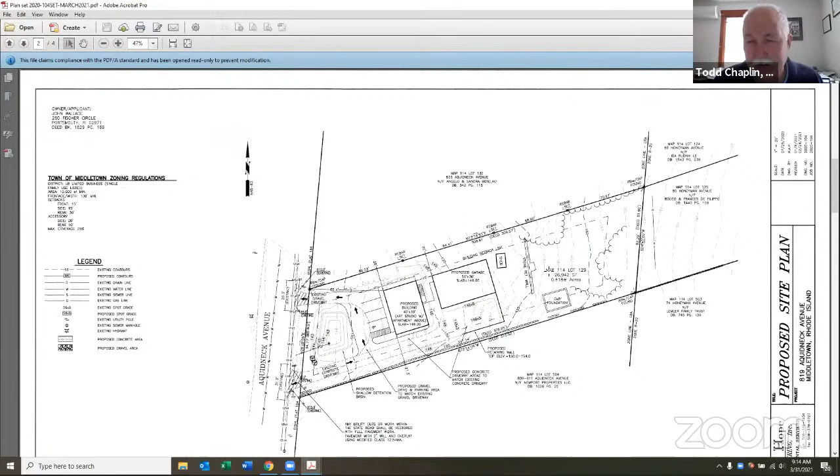Typically, that allows for the traffic to be able to accelerate out onto the main road without spinning gravel or whatever, and having that be paved just keeps snow plowing and entrance in and out of the site a little safer for everyone. So those areas are going to be improved.

We are going to replace the 2 culverts, one under each of those driveways. They're going to replace both of those and repair 3 of the 4, and probably could certainly end up being all 4 of the little head walls that are on those culverts. There's an existing shallow swale that runs along Aquidneck Ave in that area, and they will clean that swale out and restore its depth and elevation as part of that. So some of the culvert is a little filled in, and that'll all be restored back to new condition essentially.

And then there will be a new small detention basin built in the front of the property, like many of the properties that are out on Aquidneck Ave on that side of the road. The drainage calculations show that the runoff will actually be reduced from what was there before, by having this swale there prior to having the retention basin there prior to the swale. So all the storm water from the site will be captured there, and then it can overflow to the swale if need be. Otherwise, it would be retained on site.

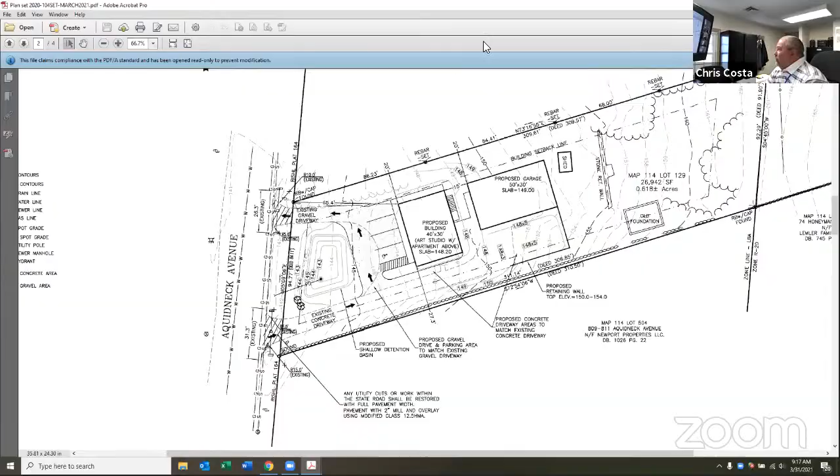Okay, special use permit - it's a little larger than I was expecting, having rentals for half a dozen people to go use their pottery equipment in a meeting place. I was almost under the impression I could do it with a home occupation, but it's a little more and above. So I think it's a great idea, but it's going to require that special use permit for the mix on this art studio.

Besides that, I'm all game. It's a very nice plan.

Yeah, it was close to being allowed as a matter of right, but oh well. I certainly understood - with the size of the garage and the square footage and how small the apartment was, the commercial wagged the dog, the tail wagged the dog is what happened. So yeah, I thought it was an appropriate request to do what we have to do. I just think it's a nice project.

Yeah. Very good. All right, you're done, Chris? You all set? I'm done. I like it, I'm done with that.

I'll help any way I can when it comes time for that application for the special use, when you get over these hurdles. Thank you.

Warren Hall, let's go to you next. Thanks, Ron. Thanks, Todd. Court, appreciate it.

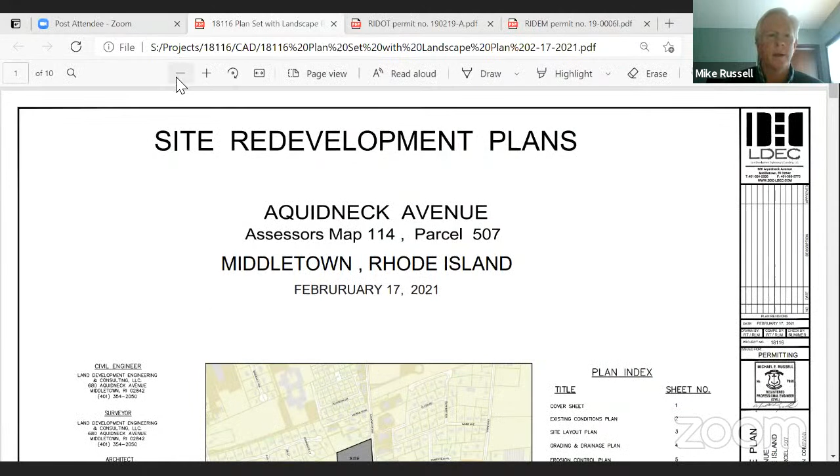Oh, okay. Yeah, I didn't know how you did the last one, whether that was there. That was me, but I just popped up the site plan. But I mean, I can do that here too, but it might be easier if you do it. All right, how's that? Can we see that? Yep, okay. Let me just zoom out a minute.

Okay, so just following up on Dave's introduction here. So the subject property, as shown on this existing conditions plan, is lot 507 on Aquidneck.

It's roughly 2.8 acres in size. As Dave mentioned, that was for a long time a contractor's area materials yard run by JM.

A1 Construction has taken that over in recent years and utilized it essentially in the same manner it had been used previously. The site is located in a Zone 1 watershed protection district.

There's freshwater wetlands to the northwest, in the northwest corner of the property, as shown here. Is my cursor active? Yep.

Okay, in this area here, all of the proposed site improvements are going to work within the existing limits of disturbance.

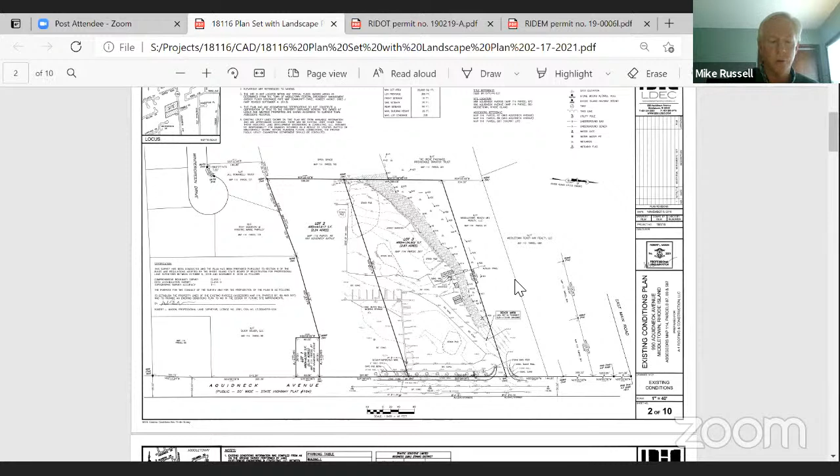So that's very important to note. As Dave said, there's 2 buildings being proposed for this application.

Let me just go to the site plan here. So the building nearest Aquidneck Avenue is going to be a mixed-use building.

It's just under 11,000 square feet in footprint area. That'll consist of office space in the front, 2 levels of office space.

And then this rear section here will be a tradesman center, which are very common and popular on Aquidneck Avenue in Middletown. The rear building will be a standalone tradesman center with different units in there.

And that's a little over 5,000 square feet. Dave talked a little bit about the access off of Aquidneck. So the property line, if I can zoom in a little bit more.

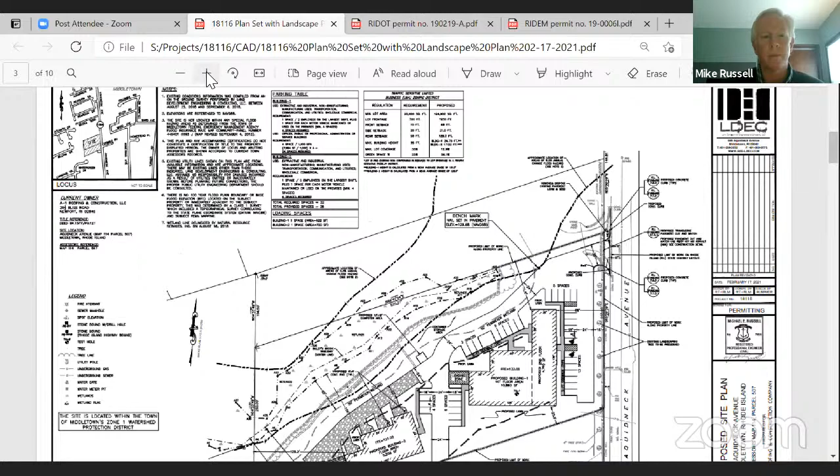So the property line effectively goes through the middle of the existing driveway that's there now. So it's used both for the Cardi's operation here to the north, and also the A1 operation.

So it's shared. What the applicant wanted to do was widen the curb cut on this property to kind of separate the two uses, the traffic of the 2 uses, and that was proposed to DOT.

That afforded them a 30-foot opening there. So there's an existing stone wall, excuse me, return there now that is entirely on the applicant's property that will have to get removed in order to accomplish that.

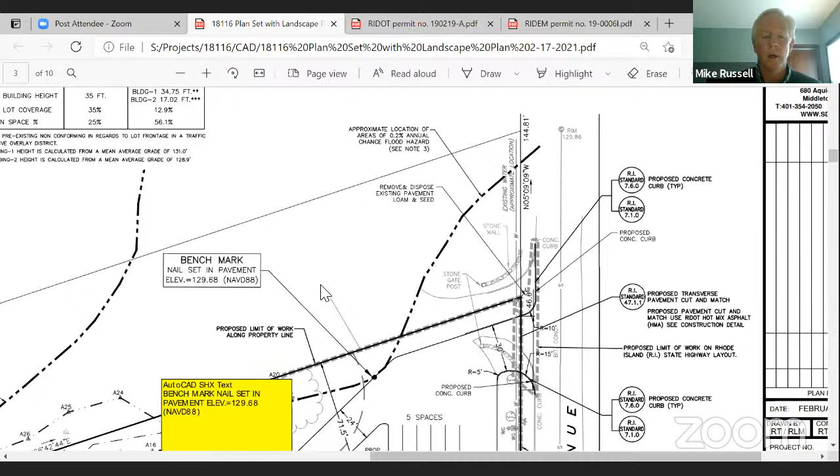So for these intended uses, we've identified the parking requirements for those uses, office and the tradesmen's units, which in discussion with Dave and the town...

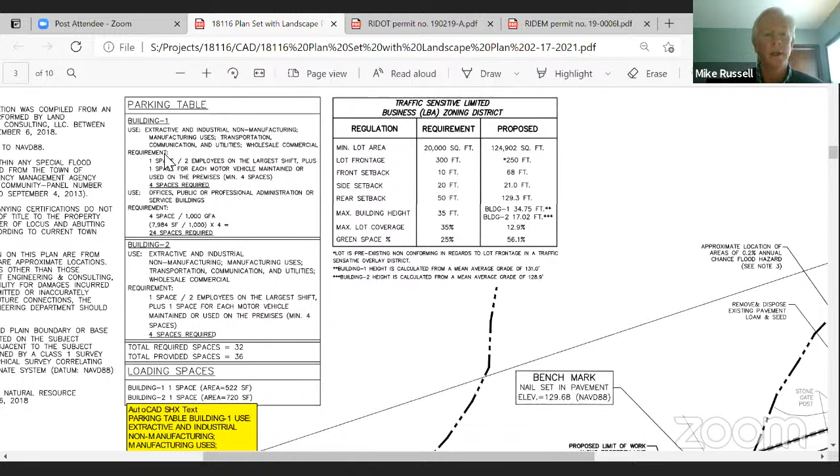I guess there's been a recent category change in the zoning ordinance. It's now called extractive and industrial non-manufacturing, manufacturing uses, etc. So from that, the required spaces are 32.

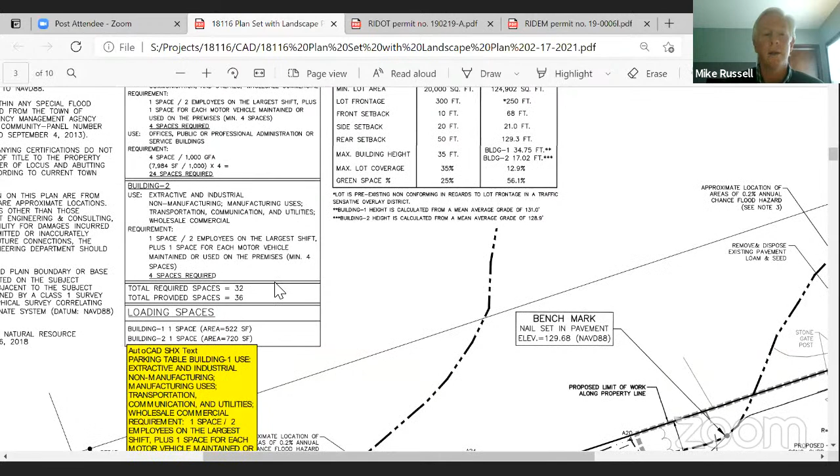We're providing 36 to include handicap spaces. We're also providing loading space for each building.

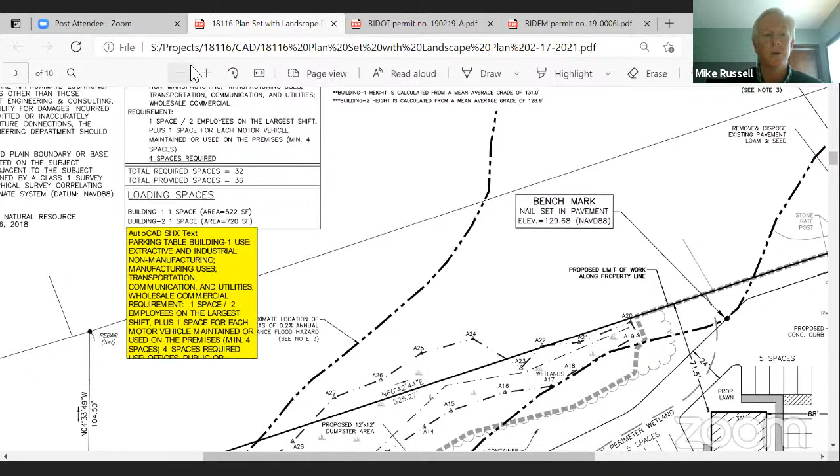If I can zoom out, we can get a better look at the overall parking. So you can see how the parking is provided around the site to service both buildings.

There's a series of sidewalks to the different door access points for each building for occupants.

We're also, the applicant would like to maintain a connection to the materials yard to the south, which he has an interest in that property as well.

I'm not sure whether Sean is on this meeting or not, but he can certainly speak to that in more detail, what his long range intent is there. But for the purposes of this application, we are showing a connection for two-way traffic to keep that loop open.

Let's see. Green space and lot coverage, we are well under the allowable lot coverage for this zone.

We're providing double the minimum required green space for this property in accordance with the commercial design standards.

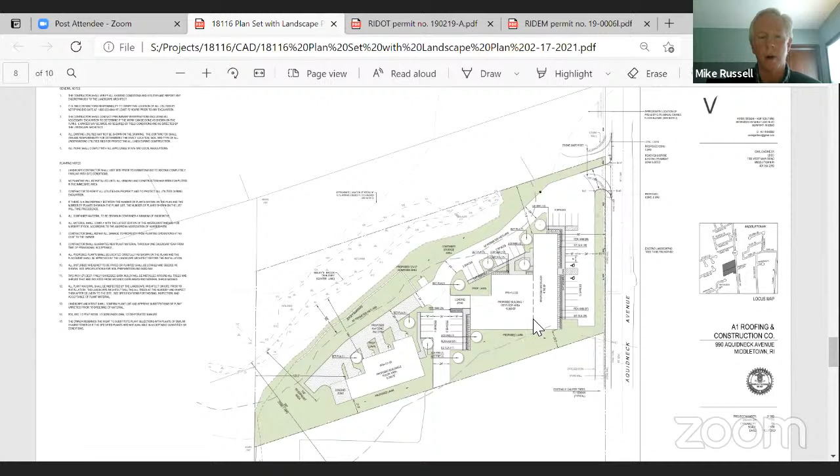There will be landscaping associated with the project as well. Pam Rogers from Verde Design prepared a plan which provides parking lot trees, lawn area, and low-level planting. We also benefit from existing street trees along Aquidneck Avenue. There are several there that are not fully mature yet, but they're well on their way. As I mentioned, we doubled the minimum required green space requirement.

Stormwater management - as Dave mentioned, this went to DEM for a wetlands permit and also for stormwater. There's nothing there on the site now, so for all intents and purposes, as far as DEM is concerned, the site is a mix of existing pavement and compacted gravel. It's nearly 70% impervious, and we're dropping that down to about 50, I believe 56%, with the addition of the green space.

This is a redevelopment project, so we employed a lot of low impact development practices - filter beds, vegetated swales - to mitigate storm flows and provide the required water quality. We're maintaining the discharge points on the site, which are to the rear, toward the wetland. Everything flows from Aquidneck Avenue towards the wetland area. We provided storm controls, and during construction there will be erosion controls to protect that resource area.

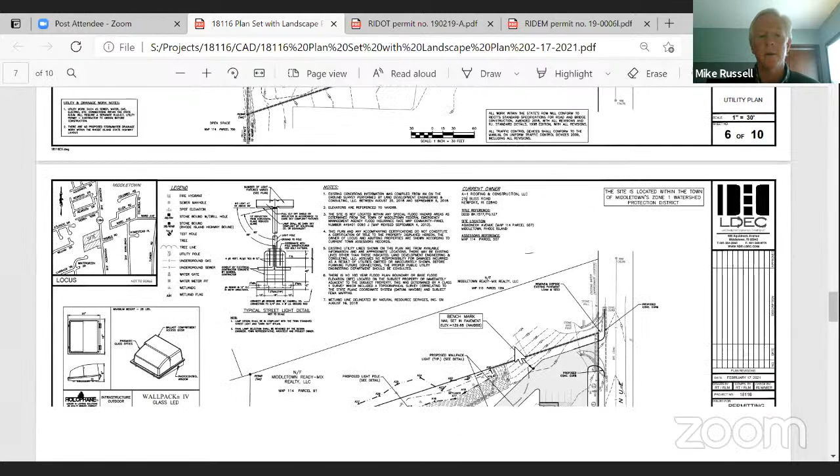For utilities, as Dave mentioned, as required by the development plan review process, we sent a request to Newport Water for availability for this use. It is available.

There will be a permitting process following approval of this project with the town of Middletown to receive water service. The plan is to have two domestic services, one for each building, and the forward building will have a sprinkler system and will need a dedicated fire service. So we need to apply to Newport utilities for each.

Sewer will be under the control of the town of Middletown. There's an existing stub here that comes into the property. We're proposing a gravity service to a manhole at the property line, connecting to that stub for the forward building. As of right now, this needs to be worked out with the town, but we're showing a force main to lift wastewater from the rear building to that manhole. It's borderline whether that can be gravity or not - I'm a little concerned about cover and we're trying to avoid other conflicts, but there is a sanitary solution one way or another for that building. For now, in this application, we're showing a force main with an exterior pump station. The flows will be extremely minimal for the rear use, and somewhat minimal for the forward office and tradesman center use.

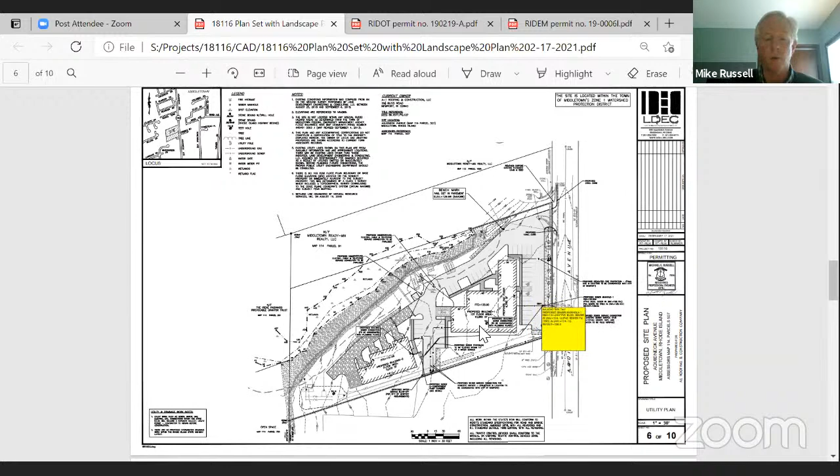The second waiver is for the 20-foot buffer to the residential zone back here. We're afforded a natural buffer there - there's no development in close proximity to the rear of this lot, so we felt an additional buffer would not be necessary and the waiver was justified. Those are the 2 waivers being requested.

Do you have 20 feet of natural vegetation on your property? Even if it's not landscaping, if it's natural, that could satisfy it. It doesn't necessarily need to be formal landscaping, as long as there's some sort of vegetated buffer of 20 feet on your property.

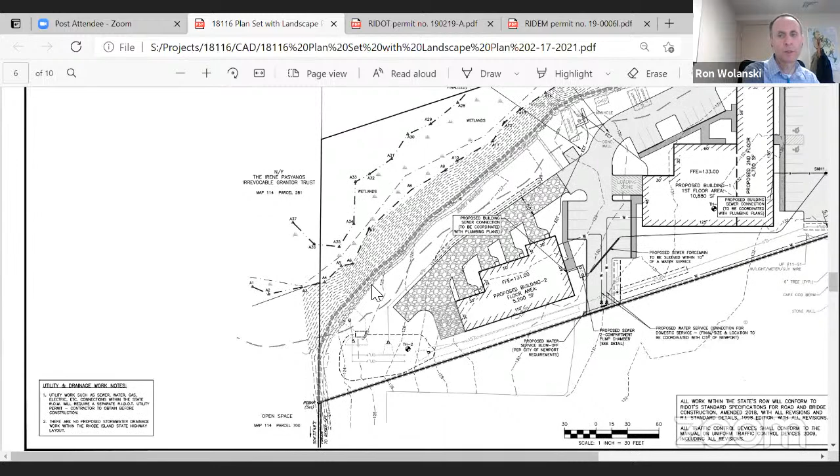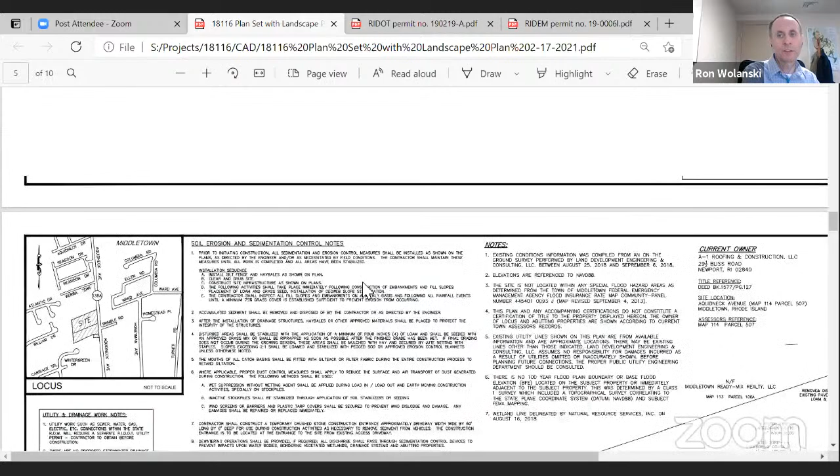What would qualify there, Ron? Vegetation - grass? Well, it's got to include screening, so if the vegetation is 6 feet tall, certainly... yeah, I think in this area here, because of the grading, this is the specific area why we requested the waiver. Oh, okay, all right, never mind.

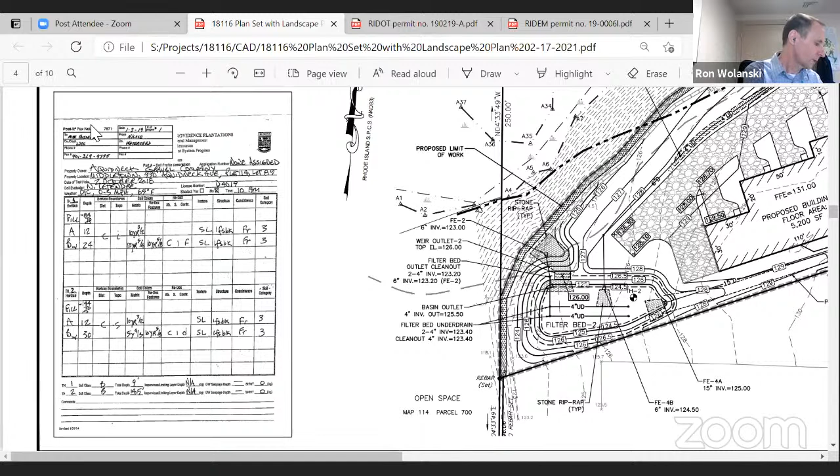So that's a general overview. I may have missed a couple of points in the site improvements, but happy to turn it over to the TRC members for questions and comments.

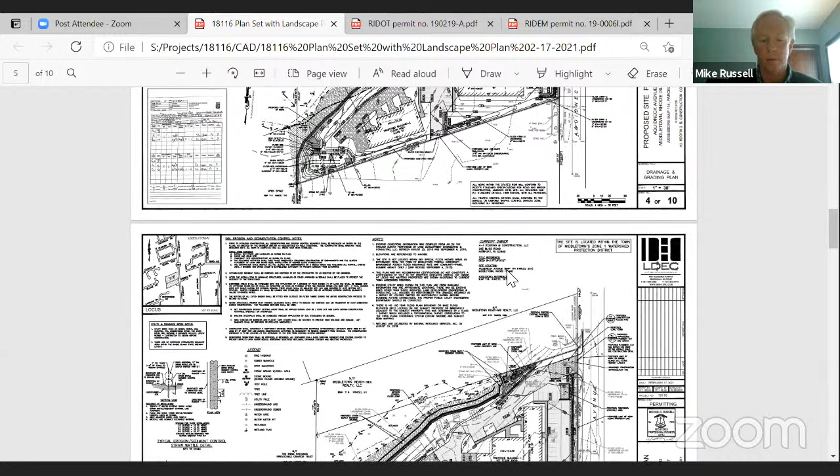You want to go first, Warren? Thanks, Mike.

A couple questions on the drainage calculation - since it's a redevelopment, 50% of the water quality volume needs to be treated, correct? That's correct. Is that what your volume is, or did you go further? That was the approach, yep, for redevelopment, to meet that at minimum.

And then I know you mentioned the wetland permit, July 2019 - do you know the shelf life on that? Is it 4 or 5 years? It's a 4-year permit. Okay, so that's going to stay current.

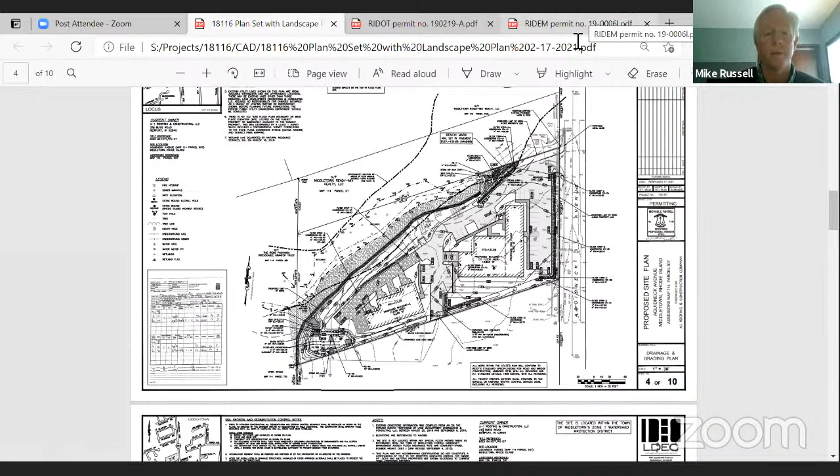And how about the physical alteration permit from DOT - what's the shelf life on that? I believe it's 3, but let me just check while we're talking. We're coming up on 2 years for these, right? Yeah, I'm coming up on them. For whatever reason I can't access that, I'll dig it up while we're talking. I believe it's 3, Warren.

Good, okay, just for everybody's benefit here - the other item I had was the north edge of your paving, the parking area, your driveway access basically. It's 3 years, Warren, sorry, that just popped up on DOT. Oh, they're good for 3. Yep, DOT, okay.

North driveway - I'm interested in the curb you have along that edge. Is that water going to peel off there and flow right into wetlands, or is it directed along that edge via curb to your basin, to your treatment? Okay, let's zoom in on that area to make sure I understand your question and can answer it.

All right, Ron, did I stop sharing? Yeah, no more sharing, Mike. How's that? There you go. Yep, okay.

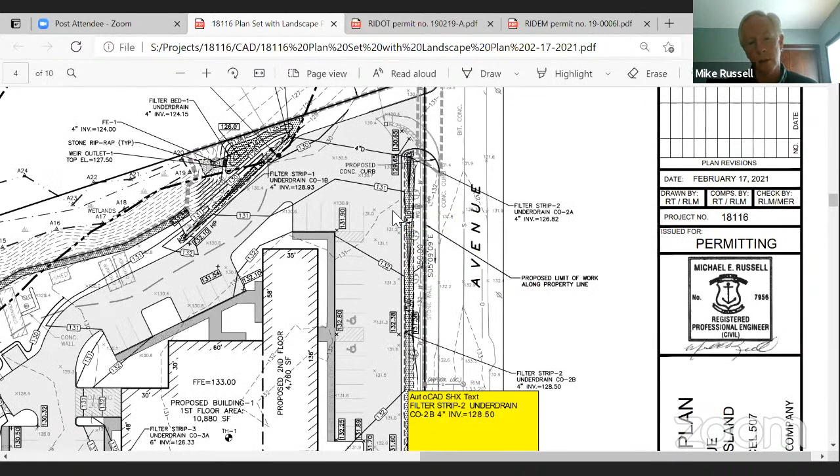As you enter the site, the Carty's property to the north sits lower than this area. Looking at the proposed contours, which essentially mimic what's existing, as you pick up this elevation here, everything that breaks off this corner of the sidewalk will get into this filter practice. Everything else will continue where it's going now - it's basically this small area right here, Warren, that'll continue down to the lower area. But the overwhelming majority of everything on the site will get to this practice first, then to this practice along the parking area parallel to Aquidneck Avenue.

So everything inside this driveway that sits low is canted towards Carty's - there's no way to deal with that on the applicant's property. We're picking up as much as we possibly can, but it's impervious to impervious; it's not like we created anything else there that would go unmitigated. Yep, I see that, absolutely. And then as you head further west along that edge of pavement, Mike, what happens then?

Right in here? This edge here, yes. This here is a filter strip. Right, so that collects everything off of, well, we have a series of filter strips.

That's the practice that we had, for all intents and purposes. It provides storage, it provides infiltration, and it provides treatment. But the practice as it relates to DEM's approved practice is a filter strip. So this is all along this existing limit of disturbance.

We are providing a filter strip, and then we're providing a filter strip along this edge. And then you have this practice down here. So how the flows split, they get to these three different practices off this west edge.

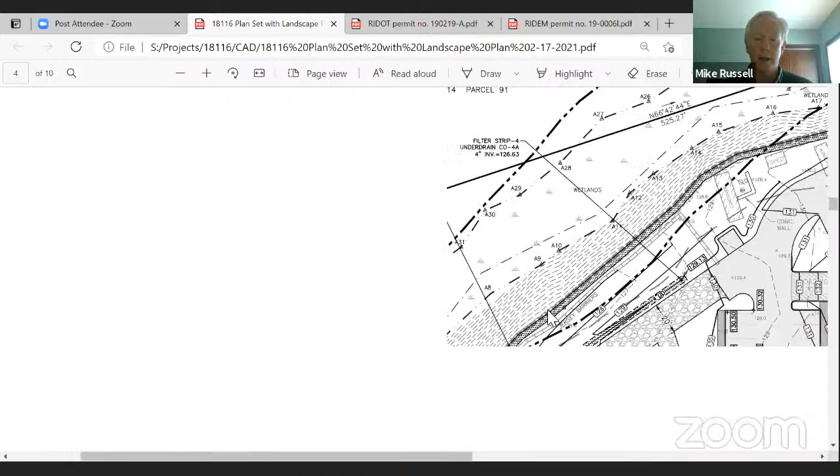So those under drains are interconnected, and they all either work to this discharge here, or the discharge out at the other end of the site here. Perfect.

So any contaminants that flow on that impervious pavement asphalt that you're proposing are going to be intercepted by the filter drain before they get out into the wetlands. That's correct.

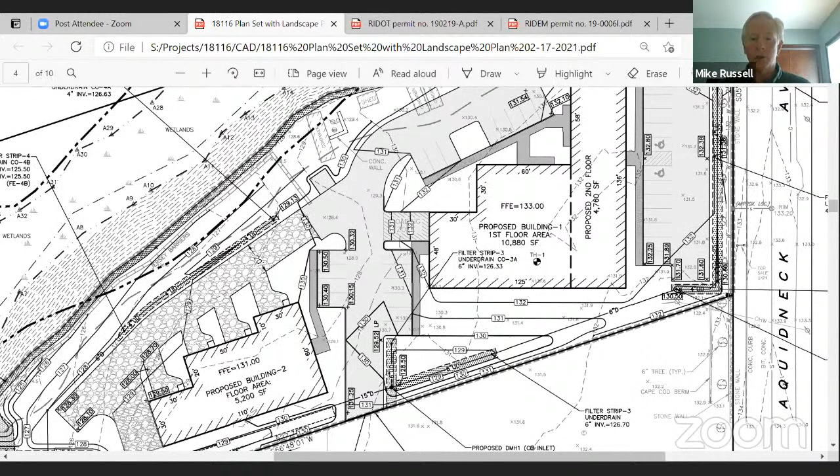And it's essentially a perimeter system. If you follow this all the way around the perimeter of disturbance, you'll see a stormwater practice there. Everything is on the perimeter, basically surrounds these buildings and the parking. Got you. Good, good. Thank you.

And I just see the calculations. You've got 2, 10, 25, 100-year and the water quality volume. Okay, yep, great. Yes, sir.

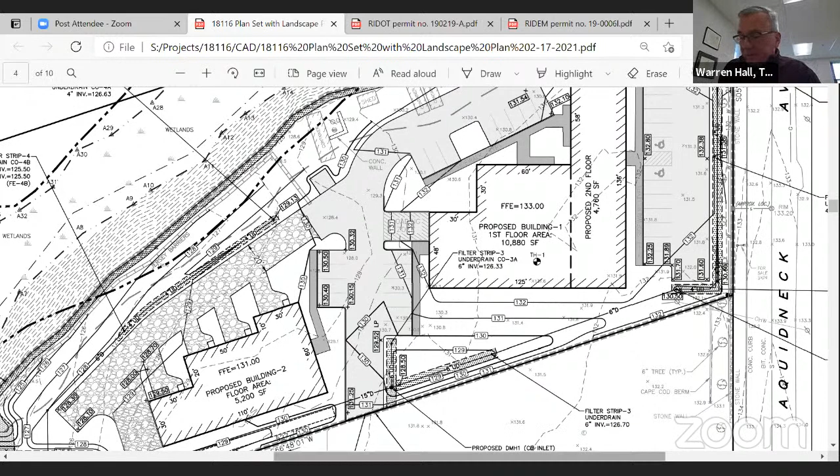I think that's good for me with the exception of the driveway. Going back to the driveway entrance, we just had a pretty good discussion about the angle of that, Mike. Is there anything you can do to square that up a little better with traffic, or I'm just looking at that.

Square it to what? Square it to the existing edge of pave, I guess. You're talking about this? No, right up where it meets into the existing asphalt on Aquidneck Avenue. Right in there. So what's the concern here for a car exiting?

Yeah, trying to stay perpendicular to the travel lane, but it looks like you've done that, doesn't it? Oh yeah, I think it is. So that's the exit, and then the entrance is...

Okay, I see a lot of line work. Let me go up to the next one. Yes, get some of this line work out of there.

There you go. All right, so here's the existing radius return, curb return. And I got these AutoCAD...

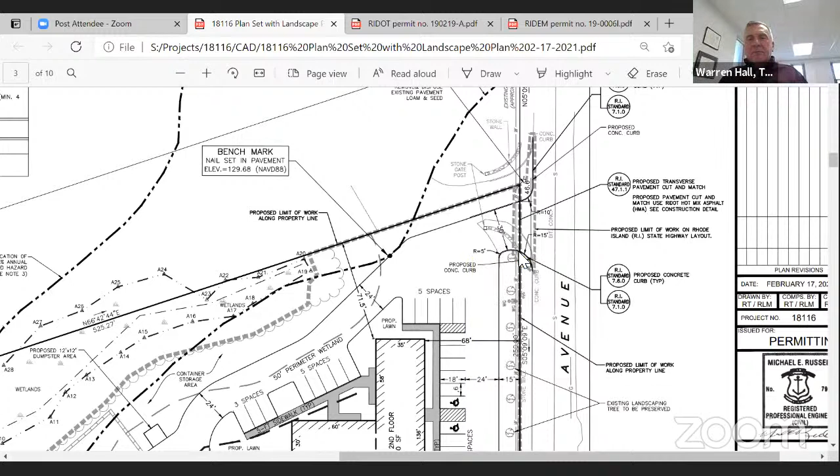Are these yellow boxes popping up? How do you turn those off? I wish I knew, it's driving me nuts.

So here's the new curb line here. Yeah, so if you can, just gonna take this cursor off.

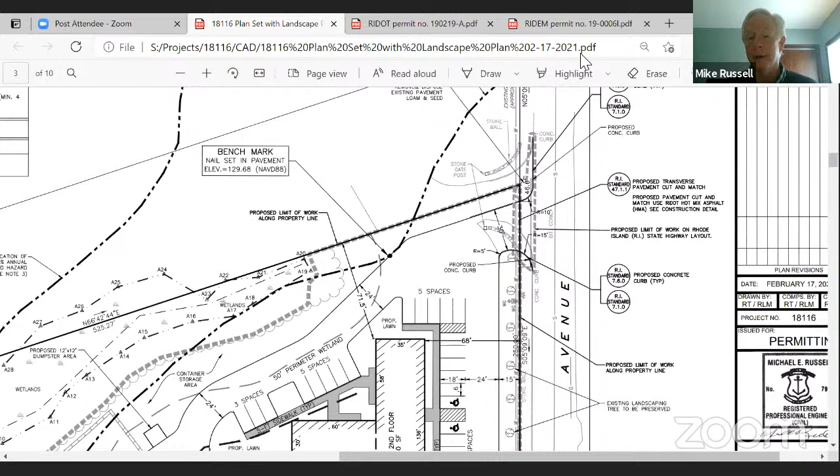I think that's a pretty wide... I mean, they added considerable width to this opening on this property, and if you join that up with what's on Cardi's, and those radiuses are perpendicular to the travel lane, to the southbound travel lane on Aquidneck, I think it's squared up. I mean, I wouldn't call that an odd angle.

Okay. And then what's Cardi? I mean, not for this property. Now, I don't know how you feel about Cardi's, but we're not changing that. And they've actually been given a little bit better movement with the vehicles that access that site. They've been afforded better turning movements as a result of this widening.

So, gotcha. So how's Cardi going to get in and out of their property? Are they going to have a new driveway, or is there another drive that I don't see here? That's the same one. Now we're holding their line. We're holding their curb cut. We're just widening it on the applicant's side of this property.

And curbing it, right? Yes, that was one of the DOT conditions. And does the Cardi traffic use this to get into their yard there to the north?

I mean, we're not... I can let Sean speak to that. I think with the size of those vehicles, you'll probably see them crossing this driveway to get in there, but I think the intent was not to make this... maybe it's an unintended benefit for them, but it was not to improve circulation for them.

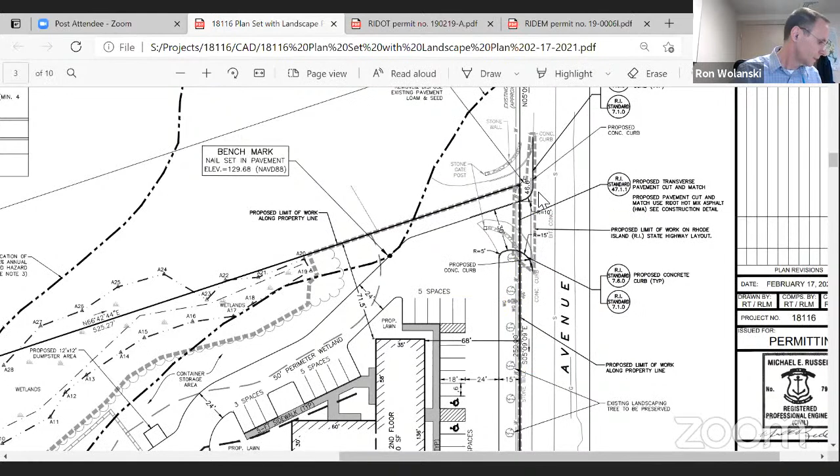You are correct, Ron. Yes, I'm sorry. No, they are using their other curb cut. I'm mistaken here. Yes. So I had thought that that was being left there.

No, we are closing that. But they do have access from their adjacent lots, they have two lots there, so that second lot up, they have access.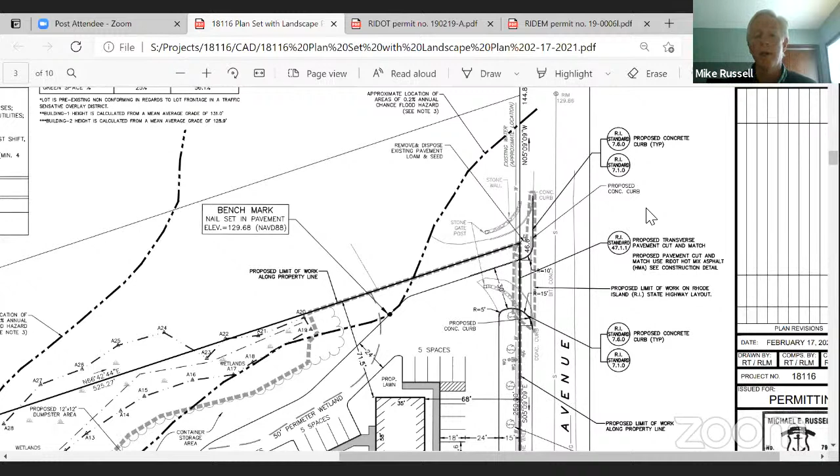Right, right. There was a back and forth with DOT; the ultimate issue was edge clearance. So your functional driveway needs to be 10 feet from the property line. So that's what it was ultimately worked out, right?

So I apologize, yeah, Cardi's will be using their other curb cut. And they're okay with losing their curb cut here then, apparently. I can let Sean speak to that, but if he's on, or Dave.

They're both on, they can unmute themselves if they want to speak. Press star 6 to unmute if you're on the phone, right? Yeah, but they're both on Zoom.

Hello? Hey, Sean. Hey, how you doing, Ron? Yeah, so Cardi's has the other entrance there to their north side. So that's what I think they'd be using.

I haven't had that discussion with them or with John Marshall, the current tenant. But I mean, I can have that discussion. I think you probably should.

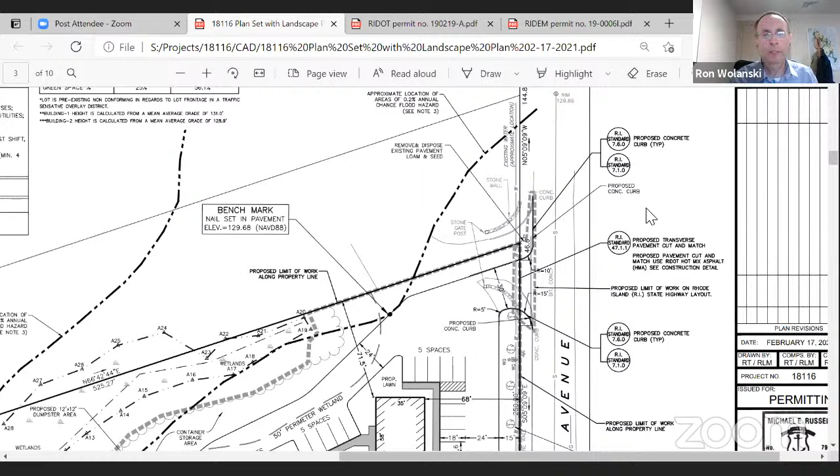I don't know that we necessarily are going to dictate whether or not their curb cut gets closed, but that's just what you're showing on your plan, that their curb cut is getting closed. So yeah, I think they should know about it.

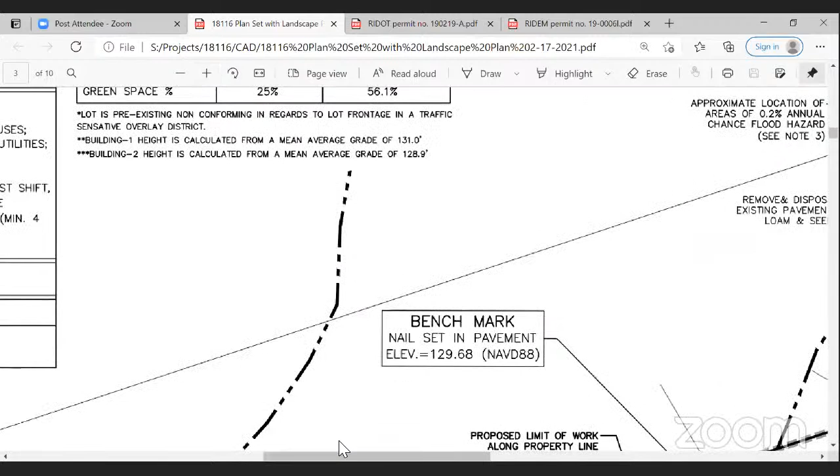Well, you know what, Ron? It is closed. Right now there's a chain across that lower entrance there that goes into the Cardi lot. So they've primarily been using their north entrance. So they don't use that now. Yeah, because we were getting too much traffic. So they can use it when they need to, but it's not a common thoroughway, you know?

Yeah, that's what I thought. That's all I have, Ron. Thank you. Mike, thank you. Thanks, Warren. Sean, thanks, Warren. Thanks, Mike. Bob, do you have any issues, concerns?

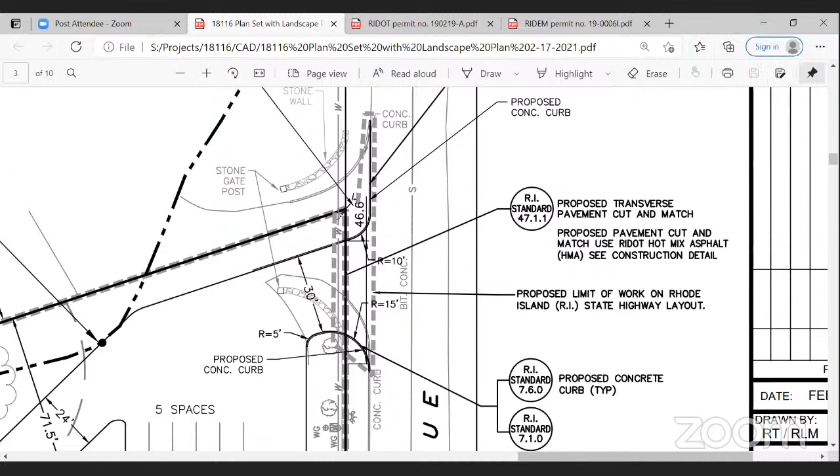I know they talked about the sewer and the potential for a pump station. Yeah, with Mike saying it's preliminary, it's not set in stone yet. So the only thing I would like to see is some pump calculations, but if we don't go that route, we don't need to do it.

And that's something that would normally be addressed later on in the permitting process anyway. Right, so yeah, that's the only thing I questioned, but...

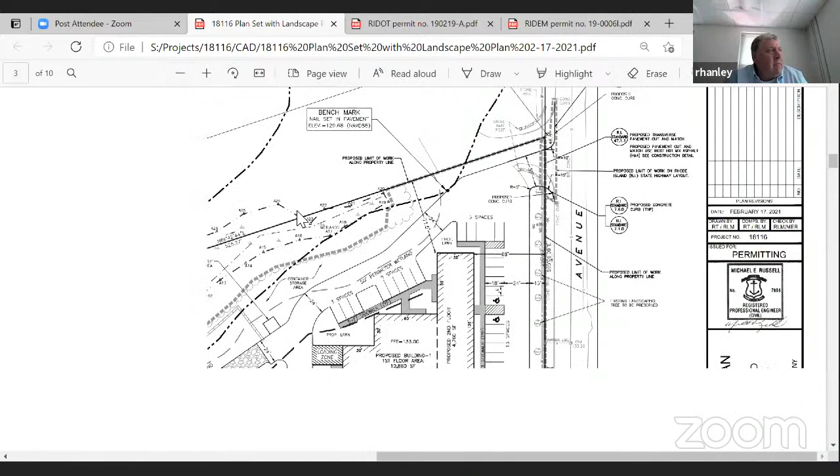The fire department had to leave early, but he indicated that he was happy with the access, and you'll be getting the fire connection for water. So I think that's all set.

And we lost Chris Costa. Not sure why he jumped off, but I think we were all set with zoning.

Mike, you said that there were no variance issues, or maybe Dave said that earlier on. No, we had the quick discussion about the frontage, and I think everyone's in agreement, provided this property stays the same and isn't further subdivided, that we meet the dimensional requirements of the ordinance for this district.

Then I mentioned the two waivers that we outlined. I'm not sure whether you agree with those, Ron. I'm sure you've got a follow-up to that.

Yeah, I had a couple of clarification questions. So you are requesting the pedestrian access waiver. There's a proposed sidewalk on Aquidneck Avenue, and there's a project actually coming hopefully fairly soon. So you can certainly go ahead and request that waiver, but there is a plan to have a sidewalk.

Warren, it is on the west side of Aquidneck, right? Yeah, so there would be a sidewalk on Aquidneck in that area.

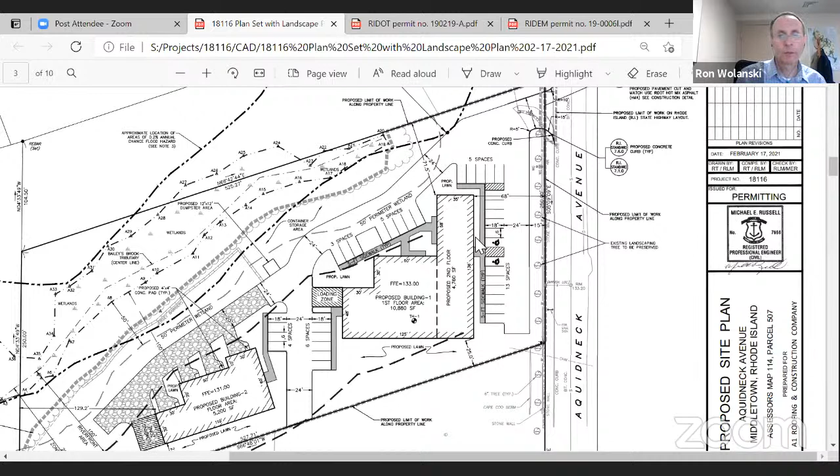I don't know that it's something you can accomplish. I think on that, we'll be requesting a waiver then. Yeah, that's fine.

Then there's a different architectural issue, the roof. You're showing the mansard roof on the front and side of the front building, but that rear building is still subject to the requirement for a sloped roof. So that would be another waiver unless you wanted to put something on that back building. The front building's rear doesn't have that faux sloped roof line, but the second building in the back has just a plain flat roof, so that would be a waiver.

I could probably turn that into a truss roof. That would be great if you could. As I always say, the fewer waivers you're requesting, the better off you're going to be at the planning board. Yeah, I could do that.

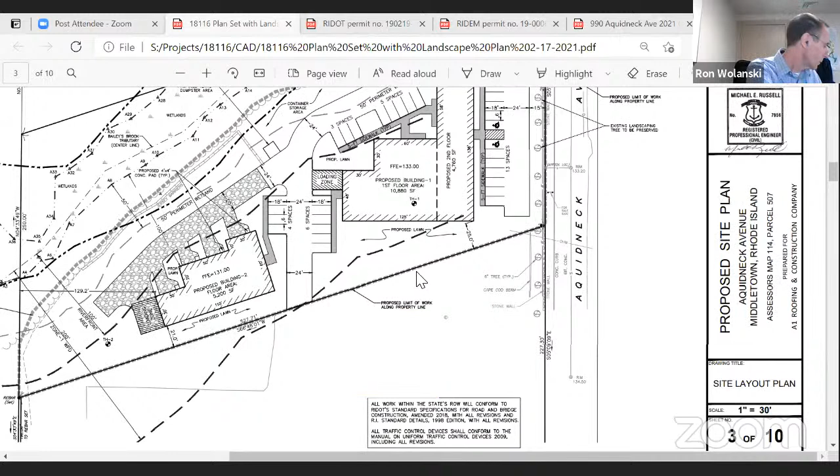The only other thing we talked about is the screening and landscape buffer along the property line. On the southerly property line, where you're basically abutting yourself, you're not showing the buffering and screening requirement, so that would be a waiver. I think you'd have a good argument to give the planning board that you're operating both properties basically together.

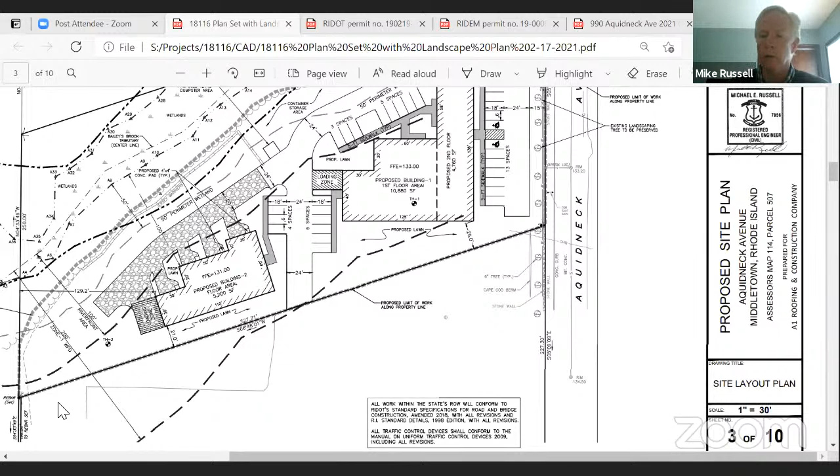Can I ask something about that, Ron? I talked with Sean about this - since he has a controlling interest in both properties, given the nature of the two properties, we were considering putting a fence along there and then a gate for vehicle access connecting the two properties. I thought a fence would count as a screening element in lieu of vegetation.

It would, yes. Did we label that fence on the plan? If you did, I missed it. Sean, is that accurate? Yes, that's accurate, Mike. What type of fence are we talking about? Sean: 6 foot, 6 foot stockade, 6 foot wooden fence.

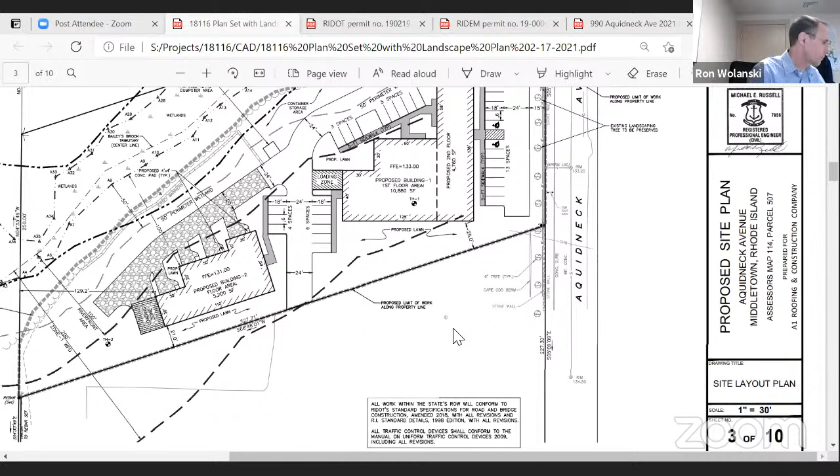That sounds good. I'm just looking at the plan now, and I don't see it, but I may have missed it. If you could just make sure it's called out on the plan. Yeah, will do.

I think that's all I had. Didn't sound like we had any particular concerns requiring conditions, unless I missed something. Warren, did you hear or think that we need any conditions of the recommendation? I don't think we need any conditions, Ron, on my part.

Okay, thank you. Well, in that case, we'd be looking for a motion to send this forward to the planning board with a positive recommendation, and I'll highlight the waivers in my memo to the planning board. I'll make a motion to forward it to the planning board. Is there a second? Seconded by Bob. All in favor, raise your hand. Aye. None opposed, so 3-0.

One other item is that the Conservation Commission meeting will be for Zone 1, so we'll be having that meeting the second Monday in April. Is that before planning? It's Zone 1 watershed, a couple days before, on the 12th. So planning's the 14th and Concom is the 12th? Yep. The planning board doesn't need the Conservation Commission's recommendation - that goes to the zoning board. I'd forgotten about the Zone 1 issue. So the planning board will also be issuing a recommendation relative to Zone 1.